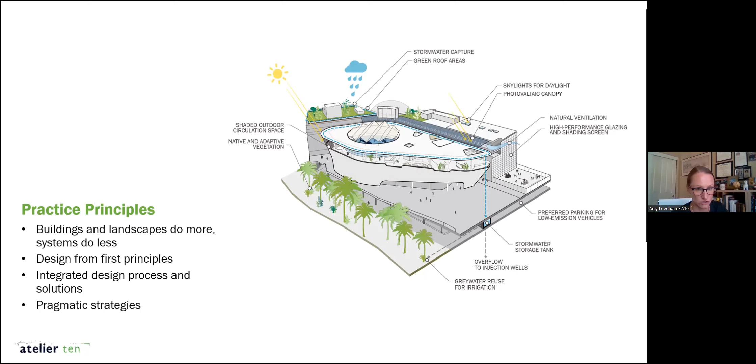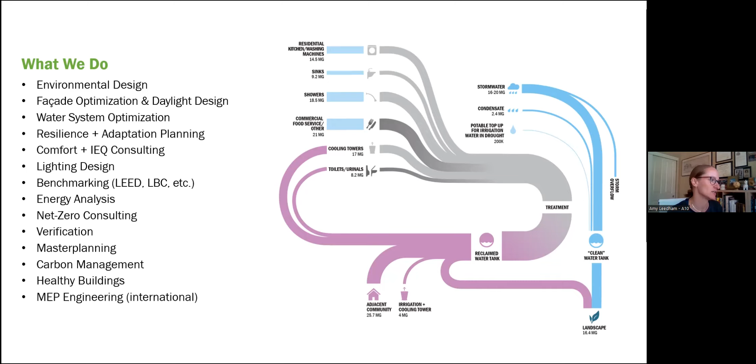For those of you who aren't familiar with Atelier 10, where I work, I wanted to give a brief intro. We are an international consulting agency. We really focus on the fact that buildings and landscapes do more — we try to have buildings and landscapes do as much as possible before bringing in the systems. Designing from first principles, focusing on integrated design process and integrated solutions, and pragmatic strategy is also really important. We do everything related to sustainability, from environmental design, facade and daylight design, a lot of benchmarking, LEED related work, master planning, energy analysis. Internationally we also do MEP engineering, so all of the things related to sustainability.

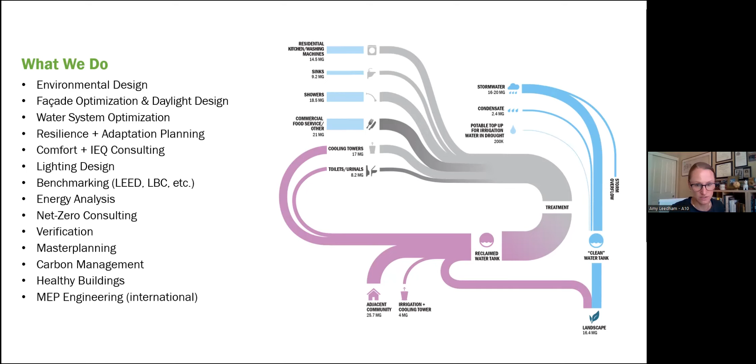As Paul mentioned, my primary focus is within carbon. I run our carbon practice with a strong focus on embodied carbon, but what I'm going to talk about today is really this concept of absolute zero carbon, which is something we've been focusing on. We've shifted our efforts, and I'll talk about why, to absolute zero carbon and why it's so important.

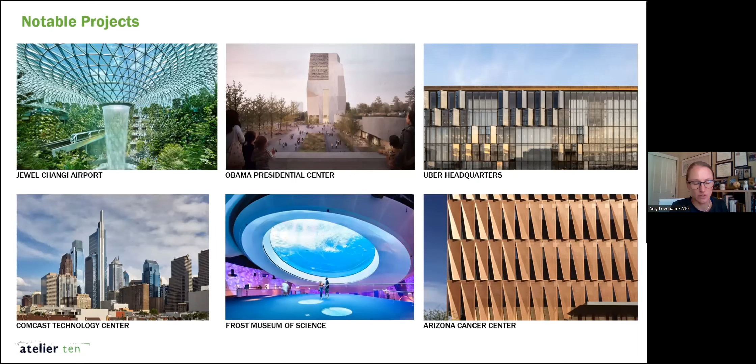So some big, bold stuff to start off with. We've been hearing this for years now, right? The IPCC has been coming out with new reports every year or every two years, getting more direct and kind of panicked if you read between the lines each time. Fundamentally, we have 7 years left to avert the worst impacts of climate change. The latest report said there's about a 40% chance we'll stay under 1.5 degrees Celsius. So the window is closing. We know that our industry, the design and construction industry, is capable of change to solve this environmental crisis. We've done it before, but we really need to do it again, and we need to do it more quickly and radically.

A lot of folks on the sustainability side of the building and design industry have been talking about this for a really long time. We've seen some change, but it's been really slow. It's hard to steer a large ship and change course, but we really have to figure it out. So our approach is that we really need to be at absolute zero carbon as soon as possible, and I'm going to talk about what that means.

The thing that we've had really interesting discussions about over the years at meetings like AIA National is how to message and address sustainability related issues within the full breadth of our industry in the US, across all different practitioners. It wasn't that long ago, maybe 4 years, there was a large meeting in DC, a roundtable discussion to figure out the approach for the AIA. Even though everyone agreed carbon was the thing, most people were not really compelled by carbon as something to get people's juices flowing. It was really about the other more experiential items that sometimes align with reducing carbon emissions. Carbon itself was not compelling enough for most people.

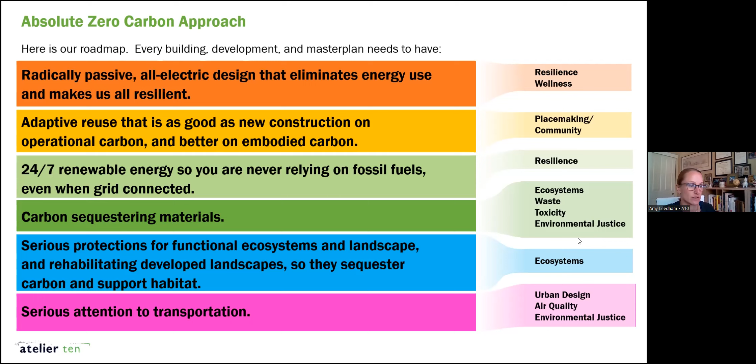And then the last piece is really serious attention to transportation. Maybe not super addressable at the scale of individual buildings for every project, but definitely addressable within master plans and city planning, and a really key piece of the puzzle.

Another lens we've taken when talking about absolute zero carbon is looking at the same information in a slightly different way. A lot of the discussion has focused on what we're seeing on the right—net zero energy, which translates to net zero carbon, really all about electric power for operational carbon. That's been a lot of the discussion in the past 10 to 15 years.

In the past 5 years, and even more recently in the past 2 years, the focus has started to shift towards embodied carbon, which is great. I think that's really important, especially when we look at short-term carbon emissions.

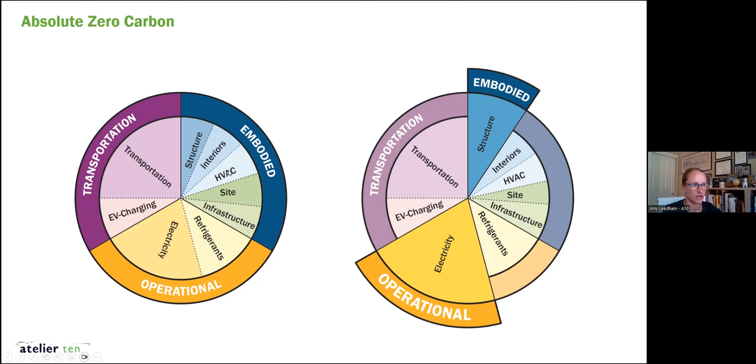Embodied carbon gets locked in when the material is produced. But we've really been limiting most of the discussion, most of the focus to structure. It's great that we talk about operational carbon and all electric, and it's great that we talk about the embodied carbon of our structures, but we're leaving a lot of the key levers we have to reduce carbon impact off the table. That's what we're talking about with absolute zero carbon - looking at everything for every project. Obviously opportunities, challenges, and limitations will differ for every project, but we should be evaluating and understanding the impact of each of these for every project.

This is a continually evolving process, a very rapidly evolving aspect of our industry. So the current things we're seeing that are already changing - we've seen pretty good advances in energy conservation through better insulating products, passive design having a comeback, and electrification expanding around the country. Not just California, but New York and Massachusetts have natural gas bans, as do other places around the country.

On the embodied side, we've seen a lot of focus on structure and foundation. Concrete especially has had a lot of focus on reducing embodied carbon. We're starting to see more focus on envelope materials. And in transportation, we've seen a pretty big uptick in electric vehicles, their energy use, and how they're charged. So these areas have been changing and are in development. It's really great to see.

But we also wanted to identify what else we need to look at and what's next. On the operational side, it's 24/7 renewables - I'll talk about that more later. Energy storage - batteries are becoming code for certain projects in California, a really important piece of the operational carbon side of things, and the technology is advancing quickly, but there's still a lot to figure out. Refrigerants are really important, and carbon capture is, I think, just a realistic aspect of the future of a carbon neutral society.

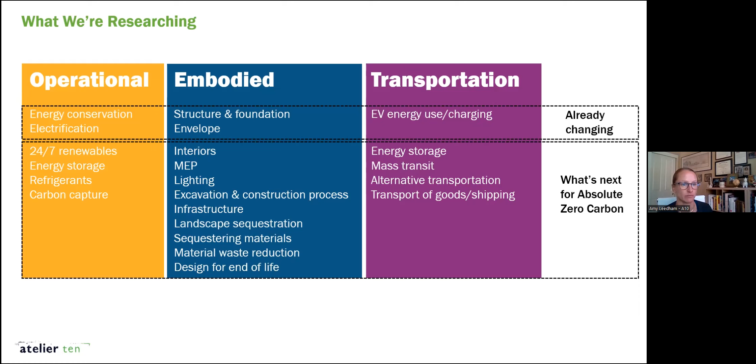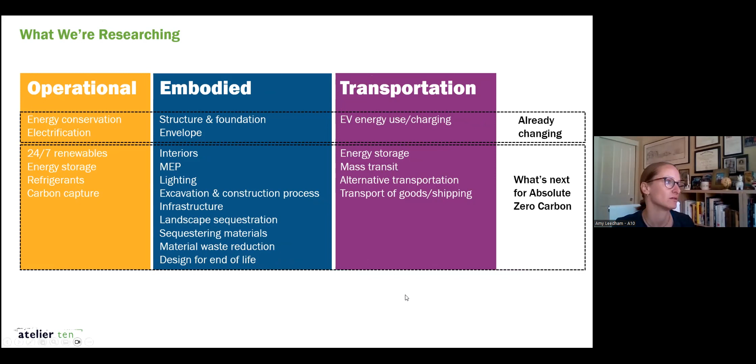And on the transportation side, really looking at energy storage. There's some really interesting alignment between electric vehicles, electric charging, and battery for buildings. Mass transit, alternative transportation, and the transport of goods and shipping is also very important, and is somewhat tied to buildings because of where we source our materials from. I'm going to skip over that one.

Okay, so that's the big picture overview of what we're talking about when we say absolute zero carbon. I'm going to start with some of the operational carbon items that I think are most critical to talk about. A key thing to start with is that as we're getting more sophisticated, as carbon is becoming more of the driver, it's really important to be clear about definitions. So net zero energy was the thing for quite a long time, and it was really a proxy for carbon. Yes, it's really beneficial to reduce energy consumption on site in terms of reducing energy cost, but the big drive to reduce energy was really related to carbon emissions.

There are lots of different ways to define net zero, but we're really talking about net zero greenhouse gas emissions. And it's really important to know that that does not necessarily equate to net zero energy. So a key thing is that it's possible to have a net zero energy building and still use natural gas. It is not possible to have a net zero carbon building and still use natural gas. So it's not a one-to-one, which I think is an important place to start.

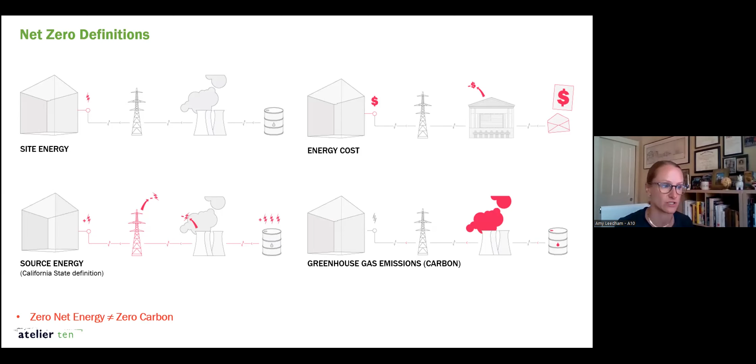The way that we're talking about net zero carbon is not even necessarily at an annual average metric, the way net zero energy is often talked about.

We have been focusing on this concept of 24/7 carbon-free energy. It just means that every single kilowatt hour of electricity consumption is met with carbon-free electricity sources every hour of every day.

So a standalone project, an individual building that has on-site energy generation and isn't connected to a grid, would be 24/7 carbon-free. Those projects are challenging because you have to make sure you have enough energy to meet your peak demand. But those kind of bespoke, standalone, grid-disconnected projects are 24/7 carbon free.

The reality is most of our projects, even if they have on-site renewable energy, are connected to the electric grid. And so they're really beholden to the carbon intensity of that power source.

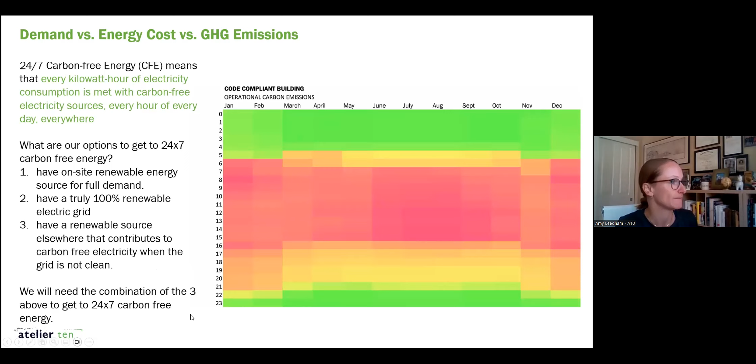The first way—this idea of first principles, I'm certainly preaching to the choir here—is really starting from reducing the energy demand of the building as much as possible through the architecture and passive design. Not rocket science; we've all learned about this in architecture school, and I'm sure we all practice it daily. But with this shift to really talking about carbon neutrality and sustainability, a lot of focus gets put on technology to solve the problems for us.

I am a part-time lecturer, and all of the architecture and developer students I teach are always asking about the cool new technology that's going to save us. I think that's our tendency as humans, to go there. But as architects, we all know that these basic principles of passive design are really one of the key strategies we have in our toolbox to solve this issue.

And they're kind of the most fun because we get to control them as architects. So nothing new here: massing and orientation, design for daylight, design for natural ventilation, robust envelope and shading as appropriate. The point of the chart is to show how much of our typical building energy consumption is really influenced by the design of the architecture—driving home how much impact we can have through our design.

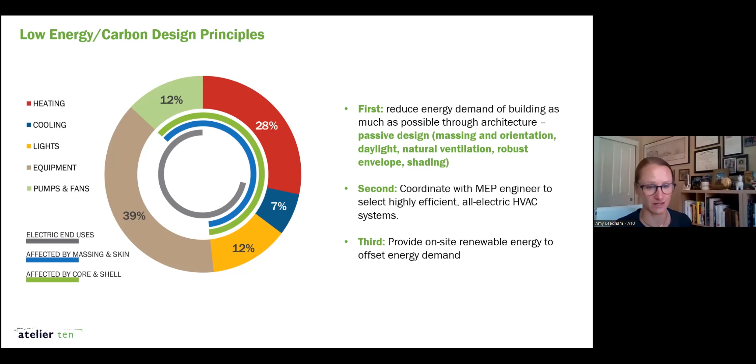And once we've done as much as we can with the architecture itself, then obviously we will need systems and on-site renewable energy, but those problems get a lot easier to solve when we make the architecture do as much as possible.

I think I'm preaching to the choir here, but a lot of clients often balk at the idea of increased insulation or increased glazing performance because of cost. But this example is really important because it shows that sometimes, if it's done right with integrated design and full coordination within the design team, you can actually end up saving first costs. This is an example of a project in the Bay Area, a private office building, relatively small size.

They put in increased insulation and high performance glazing—they actually put triple glazing in this climate, which is rare—but it ended up saving. It increased passive survivability, which we've talked about, the resilience. It resulted in operational cost savings, so lower energy bills and fewer complaints.

It actually resulted in upfront cost savings too. If you just look at a one-to-one comparison, yes, the triple pane glazing was more expensive than the double pane glazing. But when you look at the more holistic impacts—the reduction in the mechanical system by eliminating the entire perimeter heating system—they actually saved money. And because they were targeting net zero energy, that lower operating energy meant they needed a smaller PV system. So it was even more of a bonus.

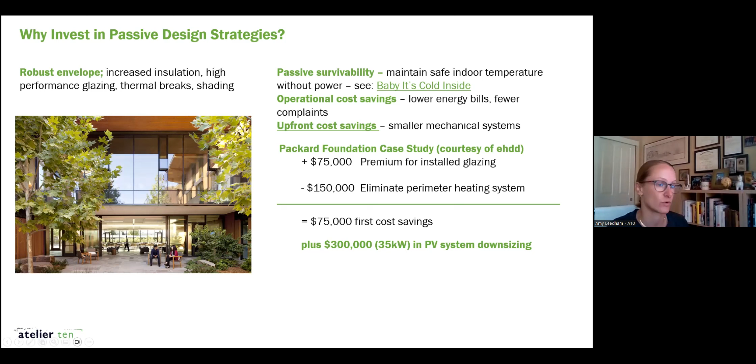So some of the things I've mentioned already, we're going to dive into a little bit, looking at all electric considerations. So we've talked about load reduction.

Other areas to focus on the building is demand response. Being demand response ready is required by code in California for certain typologies, and it basically just means you have to be able to shave off peak load for certain end uses if the grid is being stressed. Direct DC power is something that is also really helpful.

It allows you to directly use the energy generated by your PV on your site without having to convert it and end up with some losses.

And then obviously renewable energy generation. And then depending on the scale of your project, thinking of district scale and grid connections is also really important. So thinking about energy storage and microgrid.

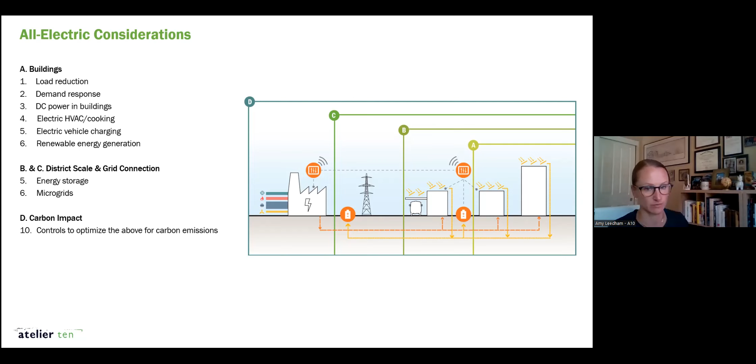I'm going to have a little discussion on a microgrid in a second. And then controls. Controls is a really important piece of this, and I'll have an example in a second to show why.

So when talking about electrification, just diving a little deeper, this really means electrifying domestic hot water, space heating, food services and cooking, and laundry.

Domestic hot water would be switching from a boiler to a heat pump, for example. Space heating would be switching from a boiler to any type of heat pump or VRF system.

Food service and cooking is one that we often get the most pushback from, especially from corporate clients, but induction units—there's lots of good research out there now to show the co-benefit of interior air quality and health from switching to electric cooking, and the really good induction units that are kind of equivalent quality to gas.

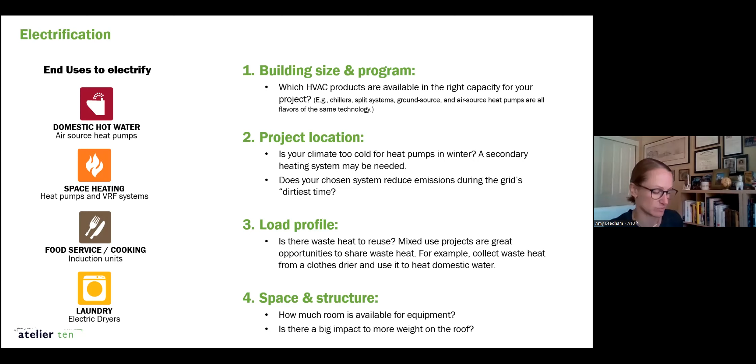To the point where Microsoft and other really large tech companies have switched to fully electric cooking, even for their large cafeterias. And then obviously electric dryers—that one's probably the easiest switch to make from a user experience point of view.

So then thinking about renewable energy, obviously the preference is for on-site renewable energy, but not every project is going to be able to do that. Many projects are overshaded or require significant rooftop equipment, and so don't have a lot of space for it.

And frankly, most of the larger projects are not going to be able to have enough space on site to generate enough power. So then we're really going to offsite renewable energy. And we've kind of classified it into 4 tiers.

Every project's going to have to do this kind of due diligence for themselves, but I think some things to look for are additionality—the term for the program you're signing up to resulting in new renewable energy. It's not just buying RECs. That would be tier 4.

But I think each region is going to have different options available, some from the utility and some from private solar developers, but really kind of understanding the options that are available for your project to opt into off-site kind of carbon-free energy.

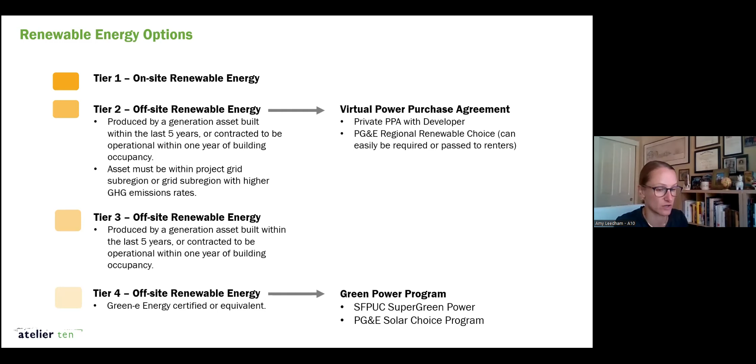I think a lot of folks here are probably familiar with the standard on-site roof-mounted PV. But I think one area that is developing quickly, and as projects are trying to generate more energy on site, is becoming more of a design issue as well, is building integrated PV.

So there's lots of different ways to do it. We're kind of showing here the range from, generally speaking, unfortunately, the options that have the most meaningful production, which are on the 2 ends, maybe have the least desirable aesthetic impact.

And where we stand now is the kind of products that are in the middle here, that are more easily integrated into a facade, and maybe actually have a really positive aesthetic impact, for now anyway, are not generating as much power as some of the more traditional panels.

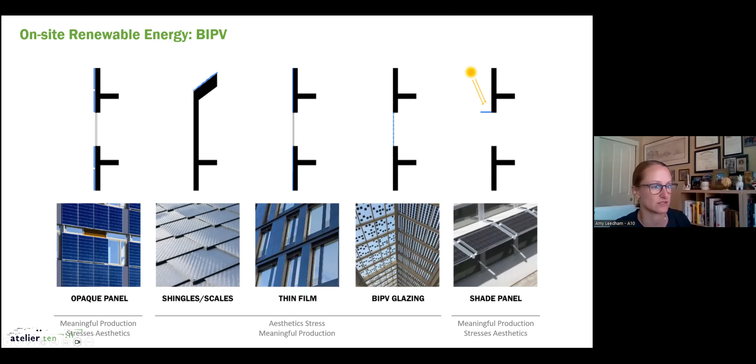But I think this is a space to keep watching. Feels like we see new products coming online all the time here.

Batteries are the next piece of the equation. I think no matter the scale of the project, an on-site battery is really helpful for resilience, in terms of avoiding power disruptions. We have been seeing increasing wildfire related or grid stress related power disruptions throughout the state of California. So battery really makes a lot of sense, especially for smaller scale projects, where the power demands are less and the system can be contained to a relatively small area.

There's lots of different ways to size your battery. Sizing it to offset a peak demand would be very different than an approach that would be sized to meet 24/7 carbon free. You would need a much larger battery to have more power to draw from in order to not rely on the grid during times when the grid is carbon intensive.

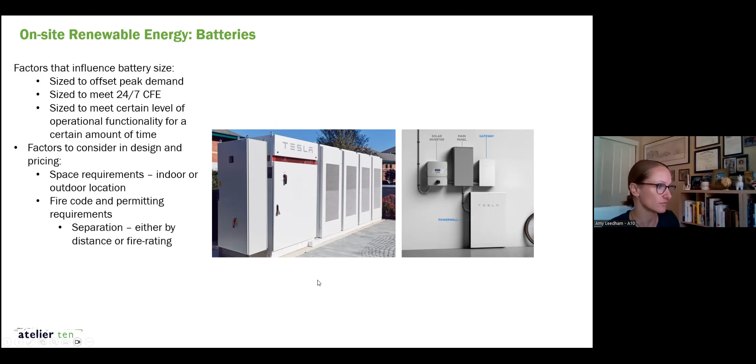So this is the example I wanted to talk through that shows, at a diagrammatic level, some of the ways these systems are connected to each other, and then the control that's required in order to interact with the grid and interact with your battery system.

This is for a private college in San Francisco. It's not a huge building, but it's fairly energy intensive. It's an art studio, there's an art studio program in it. So they've got on-site PV, and they are connected to the utility grid, but they also have an on-site microgrid in order to be able to disconnect from the grid when necessary.

There's a lot of numbers here, but really the main thing is the graphic at the bottom, which is showing how on a daily basis, they're leveraging the PV system, the grid, and the battery to be as carbon neutral as possible.

It's not operational yet, so I'm not sure if they are operating fully 24/7 carbon free, but basically this is showing a typical day. Any time the color isn't green, the grid is dirtier, we'll say - higher carbon intensity - and that's because of the fuel source being used at the power plant to generate electricity, which fluctuates throughout the day based on demand and availability of resources.

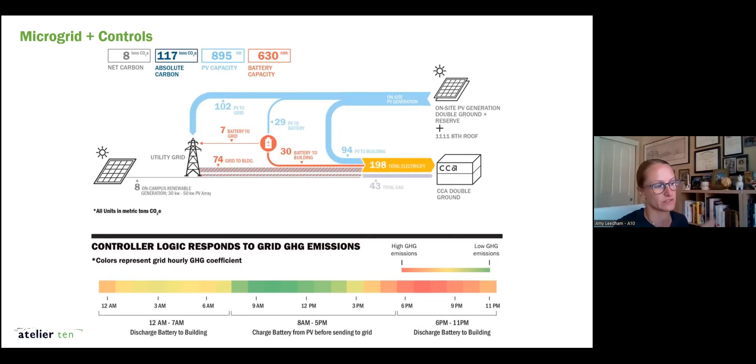This is the type of granularity you need to size your PV and size your battery and set up the controls to be able to operate in this way.

Switching gears to embodied carbon, I think just to start with some general definitions - I'm sure most folks are familiar with what embodied carbon is, but it's really just the carbon emissions associated with the materials used in the building. I think the thing that can get confusing is there's a lot of different ways of talking about it, related to the stages of a product's life cycle or a building's life cycle that are included in a discussion. I think there are three primary ones.

For products, a lot of times when people are talking about the embodied carbon of a specific product, they're really talking about cradle to gate, so A1 to A3 - the emissions associated with the extraction, transportation, and manufacturing of that product. When people are talking about buildings, most often they're either talking about upfront emissions, which is everything right up until the building opens, or life cycle emissions, which includes the full service life of the building and some end of life considerations as well.

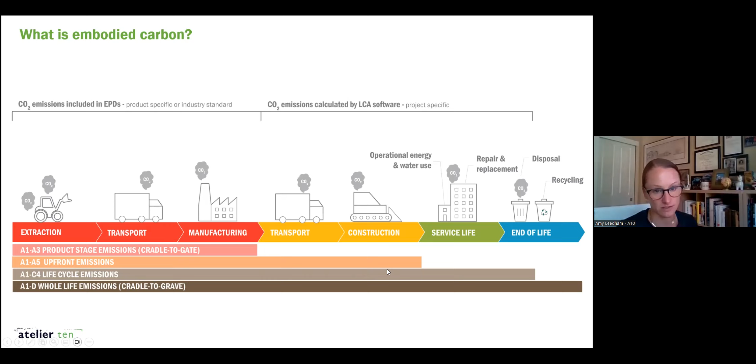Obviously, a lot can happen to a building during its service life. So I think it's really important to be clear when talking about embodied carbon and impact and carbon drivers, whether you're looking at the upfront emissions or the life cycle emissions, because the story can change depending on what you're looking at. At Atelier 10, both on the energy side and the embodied carbon side, we really try to use embodied carbon assessment as a design tool. I think it's valuable to do embodied carbon analysis or accounting at the end of a project just to understand what happened.

But I think from our perspective, the ultimate goal is to use it as a design tool to help drive design decisions. So this is just a summary of our overall process, which again, it's not rocket science. I think it follows a typical design process for any issue.

Early on, you want to figure out if you have a target, if you're going to be doing any certification. Certain certifications address embodied carbon and life cycle assessment, and those are important to know upfront if they're going to be part of your pathway.

And identifying reduction in design opportunities. Early in design, we like to identify carbon drivers. These include the massing, the structure, the envelope. Massing can be a big impact on overall embodied carbon. As these big design decisions are being made, embodied carbon should be one of the criteria that's evaluated in addition to cost and aesthetics and constructability, et cetera.

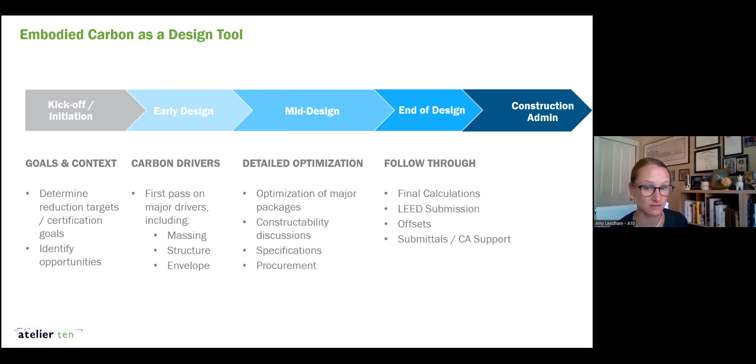And then towards the end of design, doing final calculations, any LEED submission, supporting any offsets that are required, definitely doing follow through in terms of submittals and CA reports to make sure that what the design team said wanted to happen is actually happening.

So how do we set embodied carbon goals for projects? There's a wide range, but from our perspective, a baseline would be having some low carbon specifications. There's really good resources out there from the Marin County Low Carbon Concrete Code, even the Buy Clean Act for California has some good GWP thresholds. That would be a really good place to start.

Doing a life cycle assessment, again, at the end of the project, when you have all the information to understand where you are, we would consider that baseline as well.

Kind of one step up from that would be targeting a reduction in embodied carbon. So LEED V4.1 gives points for documenting a 5 or 10% reduction for a new building. There's also interiors credits if it's just an interiors project. If it's an entirely new building, adding an interior assessment, which is not required by the new construction LEED credit, would be another good option.

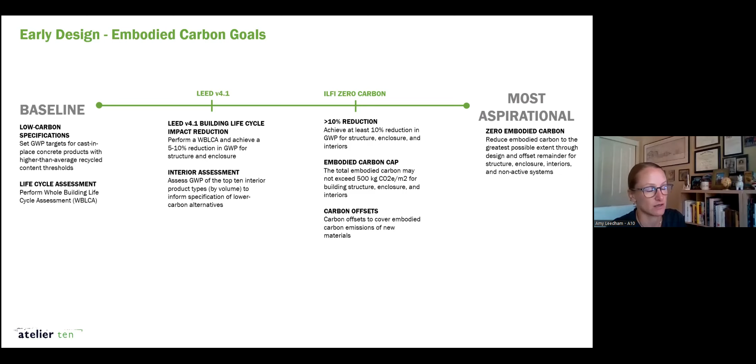And then the most aspirational would be zero embodied carbon. So it's kind of taking the ILFI zero carbon and going all the way, including more in the assessment and reducing as far as possible.

Another way of setting carbon targets gets a little bit more granular. So we just saw on the previous page, ILFI has an embodied carbon intensity maximum of 500 kilograms CO2e per meter squared. It's kind of like an energy use intensity number, but just for embodied carbon. I think it's really helpful because it's project, site, and structure system type agnostic.

But I think it's really interesting to look at this through the lens of the fact that different sizes of buildings and different construction types have quite different ranges of what's currently achievable and what's kind of currently industry standard.

The other way to look at this is from a planetary boundary perspective. So we've done a calculation based on the global carbon budget and the percentage of that that is building related, and have calculated that every single building on the planet would need to stand at 185 kilograms CO2e per meter squared between now and 2050 in order to stay under 1.5 degrees C of global warming.

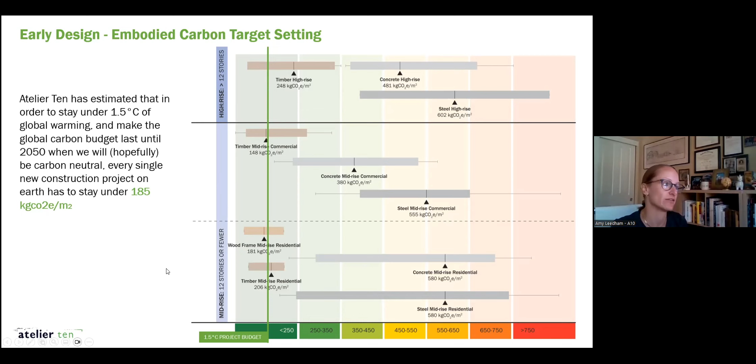Going through our process a little bit, talking about carbon drivers, it's really helpful to see where carbon is going in a building. This is more holistic, looking through the lens of absolute zero carbon. We wanted to include things that are typically excluded, so we've added interiors, MEP systems, and FF&E to really understand the distribution of embodied carbon.

This is for a typical steel framed building, just a specific example. You can do this through a consultant, or through your own data. There are a couple open source tools out there that can help with this - EPIC Tool and CARE Tool. One's for new construction, one's for renovation. I'm sure there are more, but there's a lot of open source tools that at least give a sense of some of these things early on. It doesn't have to be a huge undertaking.

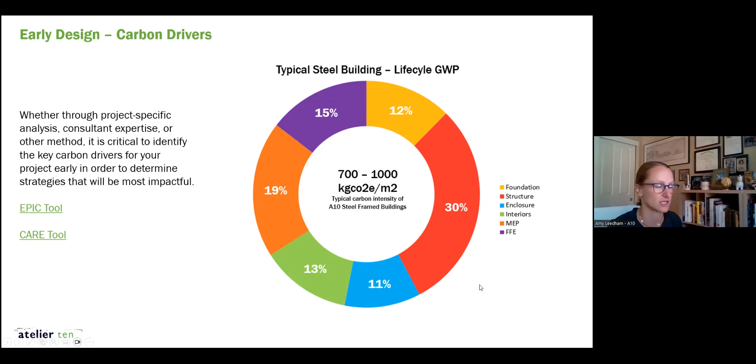So when we look at that previous chart, where are the biggest reduction opportunities that we're seeing? This is pretty generic across all building types and sizes, but using mass timber or other wood-based structural members tends to have the largest impact. This can be anywhere from a 15 to 50% reduction, depending on whether it's a hybrid system or a fully mass timber system - lots of variables there.

But it can come with a cost premium - doesn't always have to, though. There's some really interesting reports coming out of the recent mass timber conference that looked at the cost premium of mass timber for several projects, and some actually showed a cost savings because they were able to realize construction time reduction pretty significantly. Others still had a cost premium because it took them a while - the first couple buildings, they didn't necessarily know what they were doing super well on site, so they didn't get to realize the schedule savings from using mass timber.

Concrete optimization is a huge one. There's a lot of effort around not only the state of California, but around the country, to really focus on concrete reduction. Depending on the type of building and the region, we've seen this be anywhere from a 5 to 30% reduction. The 5 is more when it's a steel building that has some concrete, for example; 30 is when you've got a full concrete building and are able to push your mixes in terms of GWP. Surprisingly, this tends to have a really minimal cost premium - these are all project budget cost premiums.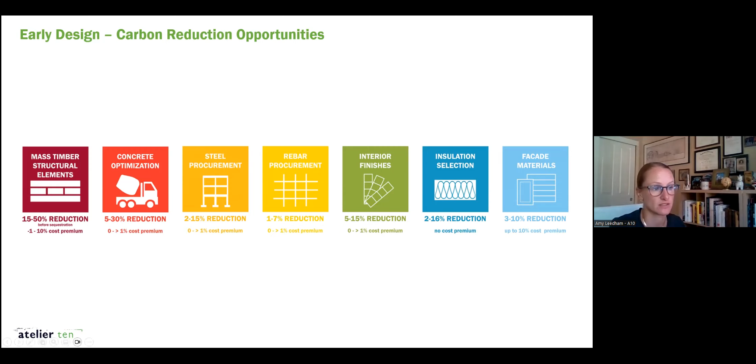The three on the right are often overlooked, but interior finishes, insulation selection, and facade materials tend to have minimal cost premiums. Some can have higher, but especially when added together, they can be as impactful or more impactful than some of the structural system decisions. Especially if you do all of these together, you can get pretty significant reduction.

Talking about structural systems - just looking at steel versus concrete versus mass timber, generically looking at what is today's industry standard versus today's best practices versus what we see coming down the line based on the technologies that the different material types are looking at. I think long term, steel and concrete might get pretty close to each other in terms of embodied carbon performance, but generally speaking right now we're seeing that the concrete industry has more ability than the steel industry to reduce embodied carbon on projects.

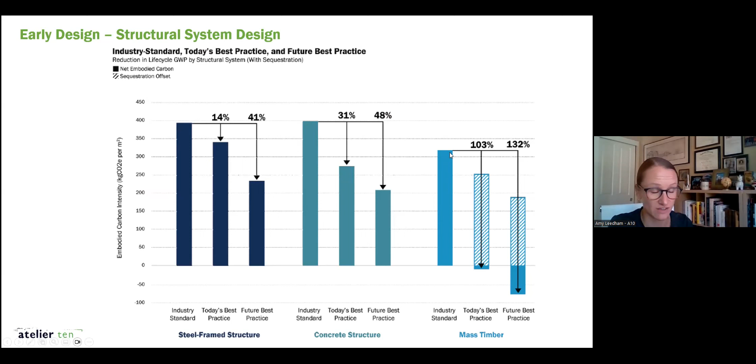We are also seeing that mass timber is pretty much always significantly lower than steel or concrete. That being said, for mass timber, a really important piece of that is sourcing from responsibly managed forests - protecting old growth forest and those intact ecosystems, but also just supporting the ecosystem in general. There's a lot that you can do around timber sourcing.

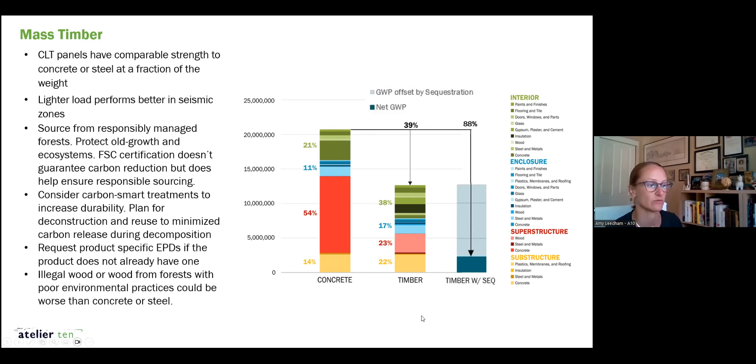I think it's a very contentious area. Every project has to figure out for itself what its timber requirements are, but FSC can be a good way to ensure a pretty high standard of sustainable timber - but it's not the only way. A lot of projects have foregone FSC certification in favor of just having discussions with suppliers to understand where the wood is coming from and see the impacts for themselves, then make the decision that way. Concrete optimizations...

The primary way this is being achieved right now, reducing embodied carbon in concrete, is replacing with alternative or supplementary cementitious material. It's the cement that's really the big carbon emitter in concrete. So replacing cement with slag or fly ash are the two most popular around the country still, and that's a really successful way of reducing embodied carbon.

Using higher quality aggregate is another one where looking at cost holistically is important, because if you just compare a high quality aggregate to a less high quality aggregate, the cost is going to be higher. But using a higher quality aggregate allows the use of less cement, which means you have to buy less cement as well. So oftentimes it comes out to be either cost neutral or even a cost savings.

We are seeing different ranges around the country depending on market familiarity in terms of percentages of cement replacement. But again, you kind of have to figure that out on a project by project basis.

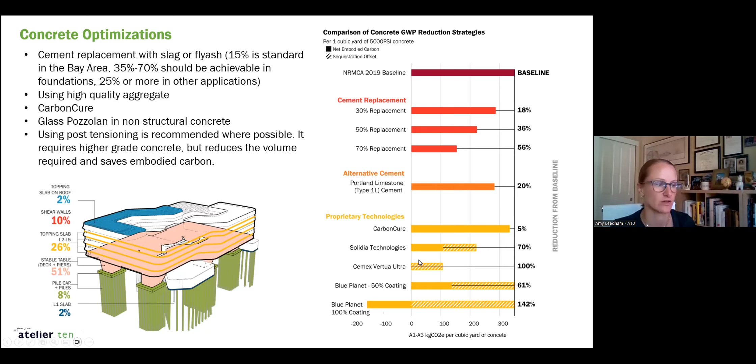Type 1L cement is an alternative product that, again, its availability changes depending on where you are around the country, but it's just less carbon intensive than normal cement. And then there's quite a few technologies coming down the line that have claims about how much they reduce embodied carbon, but I think the future is promising within the concrete industry.

For steel, it's much harder to write specifications to achieve embodied carbon reduction, just because sourcing, schedule, and cost are obviously the biggest drivers, and it's not as much of a localized thing as concrete.

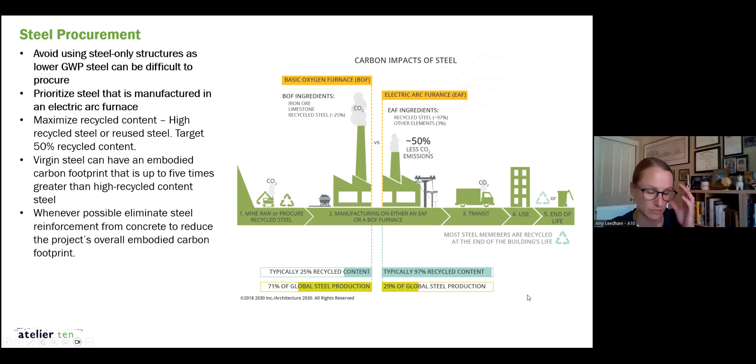So our approach is to write specs that prioritize U.S. domestic steel that comes from electric arc furnace and has high recycled content. This approach just weeds out steel from plants that have higher embodied carbon, and it still allows for flexibility, so it shouldn't increase cost. So moving on from structure, I just want to highlight a few examples.

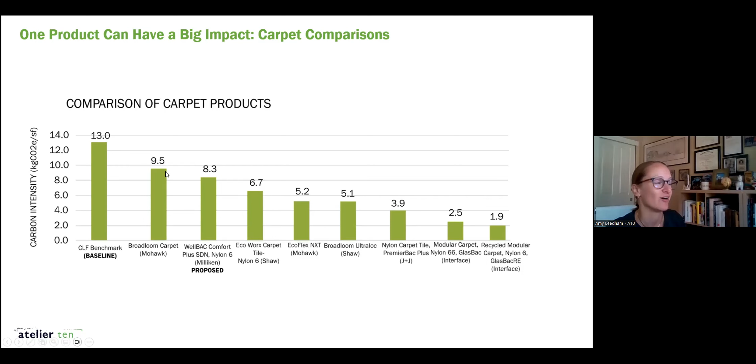Carpet is a great product to look for low embodied carbon options. Depending on your project, if there's a lot of carpet, we've seen projects that have achieved a 10% reduction across an entire new building just from carpet selection. This is just comparing the embodied carbon intensity of a bunch of different products, but you can see there's a really big drop from the left side to the right side.

I think they will be soon, but I think this is a place where the folks who work on single family homes or smaller scale retail or commercial office buildings have a really interesting opportunity to advance the industry from the bottom up.

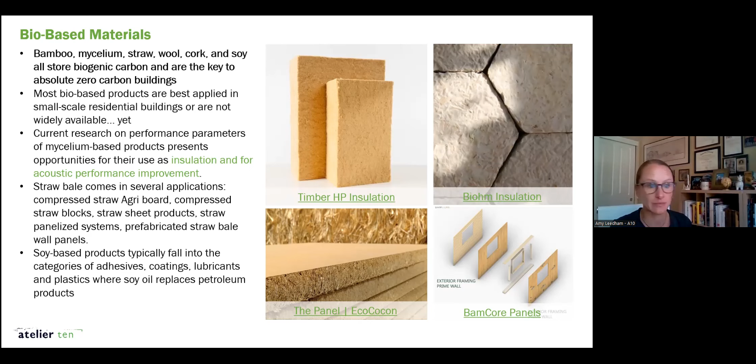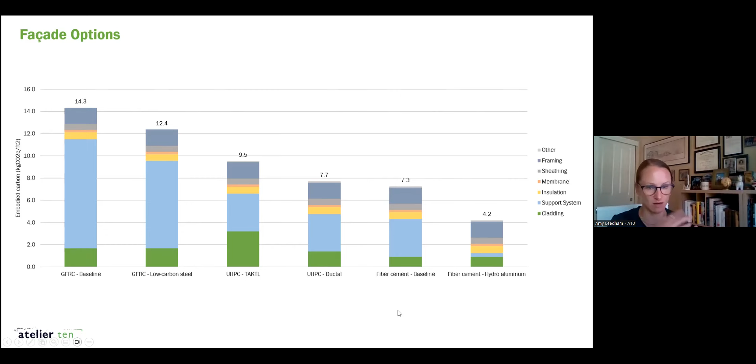But maybe it also requires a less intensive backup system. So I think that's part of what this is getting at, once we include the support system, insulation, membrane, framing, all of that, we really see that if we just looked at GFRC versus UHPC, we would probably have picked GFRC. But once we actually add the whole attachment system, we see that it's much more carbon intensive. So again, taking a more holistic view as you're making these design decisions.

One piece that often gets left out, and that we're trying to bring more focus to, is the HVAC and MEP systems. This is just a characterization from a specific project, but what we've seen is for projects that have on-site renewable energy, the PV panels are almost always the biggest driver of embodied carbon. So then you get to a really interesting discussion of the embodied carbon impact of a strategy that is purely there to eliminate or offset operational carbon, and you kind of have to do a payback analysis of that embodied carbon investment.

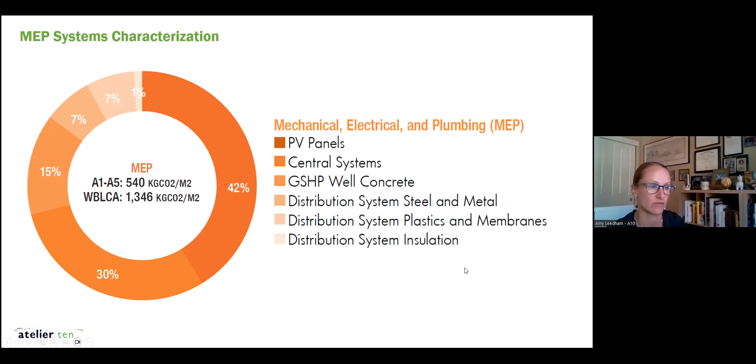I think that's part of why looking at it holistically is so interesting and exciting, because you start to see these tensions between embodied and operational carbon, and the more important factor in the short term is going to be different depending on where you are around the country and the makeup of the grid you're connected to.

The other piece that often gets overlooked, but we see as the second largest carbon impact behind PV, is refrigerants. There's a lot of good information out there about refrigerants. Generally speaking, we're a little limited in the US, especially because some of the lower GWP refrigerants tend to be higher flammability.

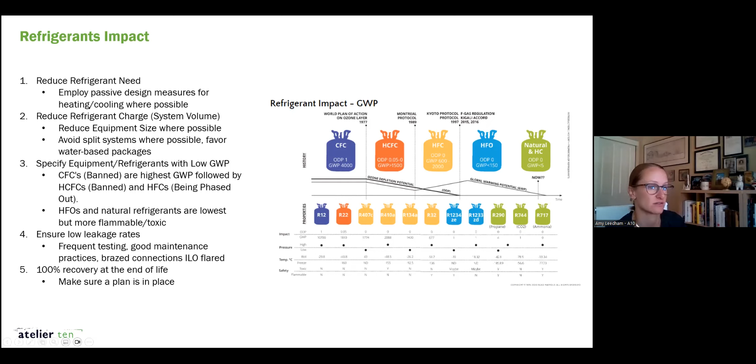So there's still market testing and safety testing that needs to happen for them to be available. But a lot of the principles we already talked about apply to refrigerants. Employing passive design and smart system design to reduce the refrigerant need is part one. Then specifying refrigerants with low GWP and making sure there's no leakage, or as low leakage as possible.

I realize we're almost at time, but I'm almost done. I just wanted to talk about a couple other areas I think are really interesting to look at, the landscape aspect of projects. Tight urban sites maybe don't have a lot of landscape, but so many of our projects are on college campuses or other types of campuses that have a lot of landscape design.

It's really interesting to look at the embodied carbon of landscape projects, because most landscape projects are not all plants. There's a lot of hardscape and infrastructure material required to make a park or landscape functional. And it gives us the opportunity to account for the carbon sequestration of the plantings that are part of the landscape project.

This is just an example of looking at the contributors to the embodied carbon of this landscape project. Paving and hardscape is obviously a really big component, but walls too—you don't often think there will be a lot of walls in a park, but depending on factors, there could be, and there are good opportunities to reduce the impact through some of the same concrete or product specification we were just talking about.

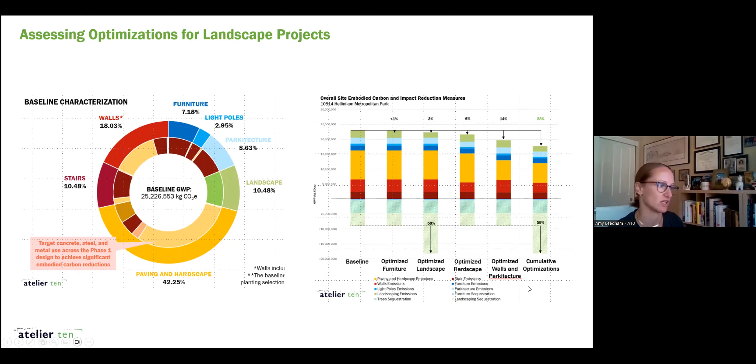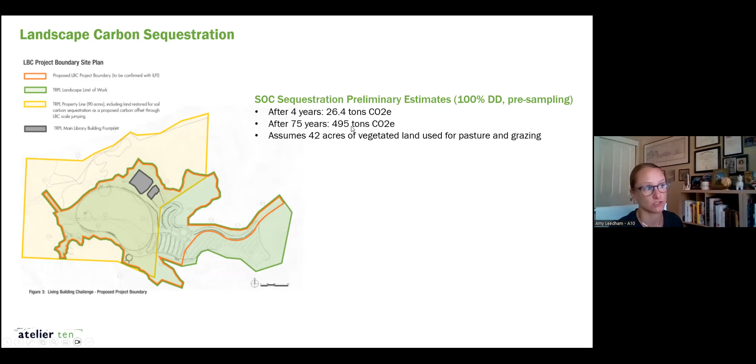Another layer of this for projects on more rural sites or part of a much larger open space is looking at how land management contributes to carbon sequestration. This is an example of calculations for a specific project that implemented land management strategies on previously grazing prairie lands, restoring it to a more functional prairie ecosystem, and how much carbon is sequestered through those practices.

The last thing I want to end with is what happens when we put this all together, which is a lot. But I think that's the point—the more you account for or address or look at in your process, the more opportunities you have to achieve reductions through interventions.

So this is looking at a holistic carbon assessment for a project. We've got the embodied carbon of the structure, the operational carbon from energy used on site, embodied carbon of interiors, enclosure, and the foundation. That's looking at, of all our carbon emitters for the project, how they're distributed. Then the outer ring shows the strategies employed to achieve carbon neutrality.

They used mass timber on site, which offsets pretty much 100% of the structure, including the non-timber components—there's still steel and concrete. They employed on-site renewable energy, which offsets more than their energy use. They've employed on-site carbon sequestration, and the remainder they are offsetting. So absolute zero carbon does still rely on offsets in a lot of cases, but I think this is a nice place to end, because it really shows what happens when you put it all together—the story you're able to tell.

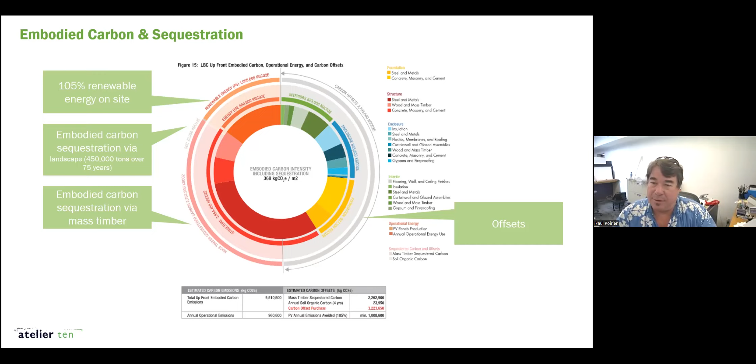I was wondering if you've run into that, where houses are getting too big to use single-phase power, and small commercial isn't quite cutting it with the 277/480 3-phase panels that are out there and all that infrastructure stuff. That's a really good point. I have not worked on that niche size. I think it's a really interesting conundrum - you're kind of in between the two. And I think it just speaks to how the industry is still evolving. It's like we need something for that in between, because I'm guessing that's probably a lot of the demand is going to be in that scale.

Well, there's some questions in the chat, I think. Oh, sorry, I didn't see the chat. I don't know why I can't see them. There we go. Oh yeah, there's the chat. Okay.

Carbon tracking and design - have you used Cove? No, okay, I have not used Cove tool. I just saw that they've added carbon tracking. I think there's so many tools coming out for different aspects of carbon assessment and tracking, that it can be really tricky and confusing.

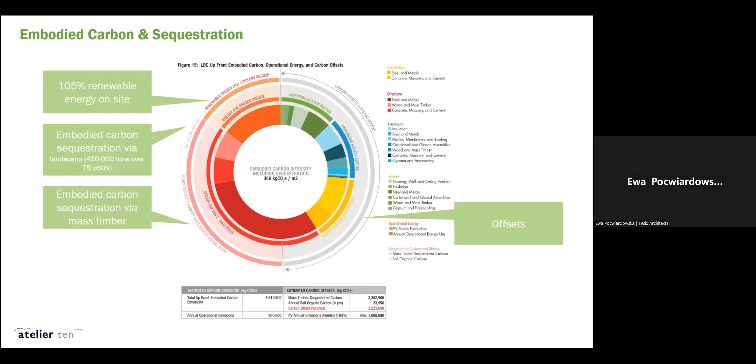Yeah, so this is in Paso. There are plenty of sites, and they're planning on actually offsetting the entire campus with one solar panel system they're going to put in - it's going to be one project for the entire campus. So I can still budget the solar storage and battery storage as part of this project, but then the panels, I can take that from the site ones, right?

You're gonna have to talk - so I've actually had this issue on a project. You have to talk to the CEC about it. I think it depends on if it's new.

So if they're putting in new panels as part of the building project, they might allow it. We asked this question for a new building on a university campus that already has an existing huge array with plenty of availability, and they would not let them use that. They are requiring them to put PV and battery at the building. That's interesting, thank you.

Yeah, okay. Well, I know we're a little bit over. I think we addressed the questions in the chat. Unless there's any other burning questions, we can let everybody go.